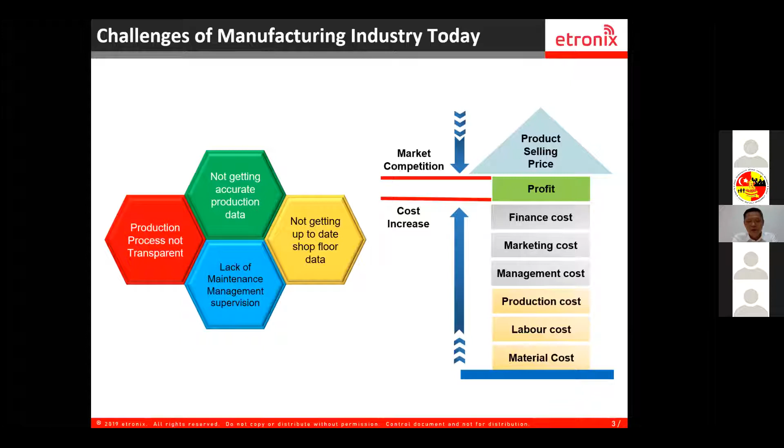Before I start introducing MES, I think it's very important to discuss the challenges of the manufacturing industry today. In today's market, whenever I meet my customers, I always give them a lot of respect, because for a factory, it's really not easy. Customer demand is getting higher and higher, and I'm sure if you're in manufacturing, your customers come back to you every year asking for cost reductions.

But their requirements keep getting higher. I have a customer who told me that last time, for every product they produced, they had to submit 3 measurements, requiring 3 people to produce the report every month. But now they have to submit 7 measurements. So customer requirements are getting higher and higher.

Cost is getting higher and higher. You have labor shortage issues. Minimum wages keep increasing, and you have to compete with so many other countries. Those are external forces, and here we haven't even included the challenge from COVID-19.

I think this is also something unprecedented in history. We had to experience 3 months where operations were interrupted. But those are the external forces.

Internally, as an SME, as a manufacturer, we have to ask ourselves: are we good enough? Do we have a very good system to manage our company, our factories? Often, when we go into a factory, we hear the problem that they are not getting accurate production data. They don't really know what's happening on the shop floor.

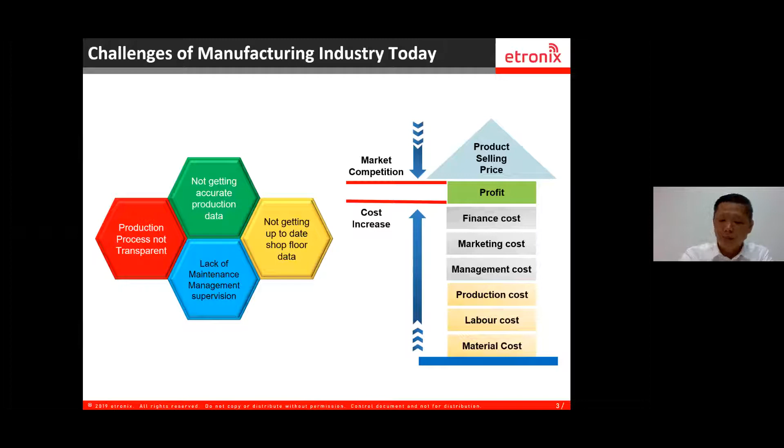This is a very conventional shop floor management issue. I've been to so many factories and studied their systems. Some of them have accounting systems, some have ERP systems to handle raw materials, customer orders, and planning. But a lot of the time when we talk about production and shop floor management, they depend a lot on paperwork.

They have manual production orders. They record production downtime manually into documents. Then the production output is recorded on a job traveler, written up manually. At the end of the day, they have a data entry clerk key all these things into Excel. By the time they compile the report, management only gets the data the next day or two days later.

Despite all the manual work they have to do, the decisions coming to the shop floor are always too late. For example, downtime happens today, but management only finds out the next day. So the decision is already too late.

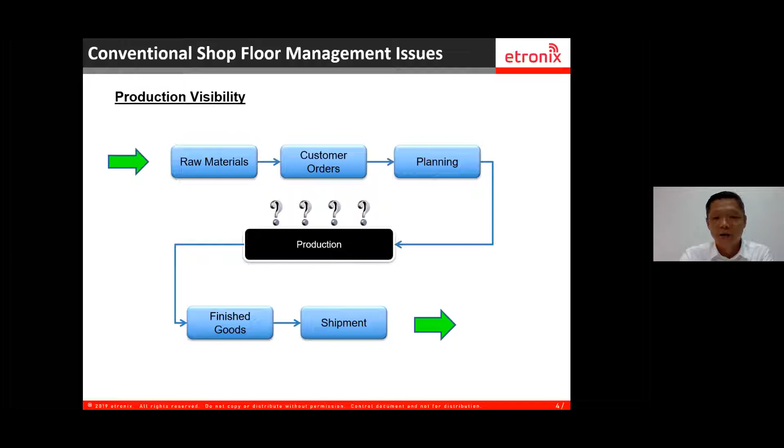Furthermore, all the data collected manually, written down by the operators or line leaders, has data integrity that is often questionable. This is from so many years of experience speaking to manufacturers in Malaysia, especially SMEs — really, on the shop floor, they don't have a proper system.

Okay, so what is the MES? MES is basically a shop floor system. It's a computerized system used in manufacturing to track and document the transformation of raw material to finished goods.

It gives management information, so you can actually know the current condition of your shop floor, and from the information that you collected, you know how you can optimize to improve your production output, and also control the multiple elements of the production process.

In short, in the manufacturing world, we talk about 4M: materials, manpower, machines, method. Method is basically the production process. Some companies say they implement 5Ms or 8Ms, but basically you can't run away from this 4M. What material you use to produce your products, who is the person doing the job, which machine you are using, and what production process it went through.

So this is the answer an MES system can provide to you.

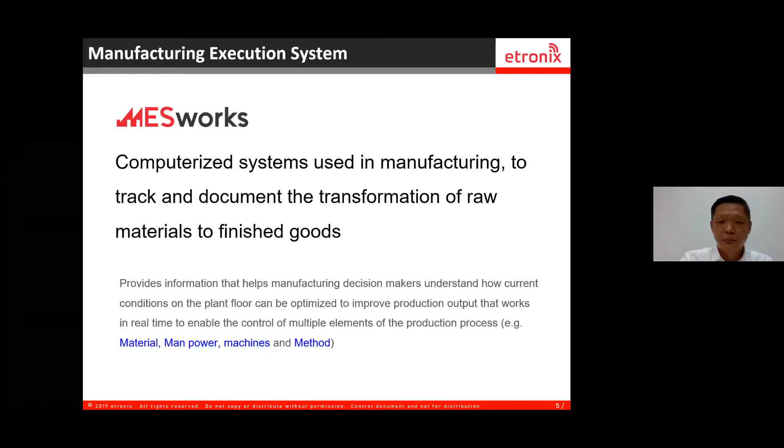In another definition by MESA, MES is also defined as a dynamic information system that drives effective execution of the manufacturing operations. So MES is purely designed for the shop floor. It covers every facet of your shop floor, and it also does the track and trace of the WIP, to give you the full product genealogy.

Product genealogy here means that when you have a finished good being produced, MES can tell you which lot of material you're using, which tool you're using, which operator is doing this job, what the quality data is, and which machine you use to do this. So basically it gives you a full product genealogy of the product that you produce.

And also it helps you to collect critical manufacturing information like the yield, your defects, your downtime, the cycle time. All this data is very, very useful nowadays, because I think manufacturing has changed a lot. The speed of model change, the product life cycle - last time we talked about 18 months.

Now, I don't think you have that kind of luxury. And a lot of data that customers want you to provide to them, including, when I produce this part, which machine you are using, which mold you are using, what the mold number is - all these things. So all this data you need to provide for the customer.

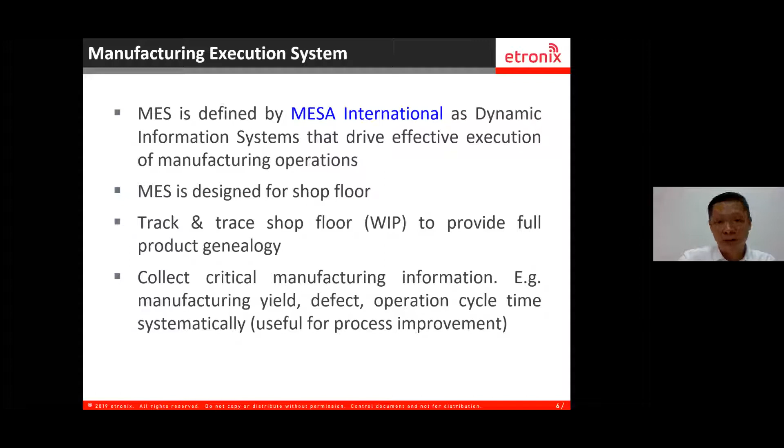I think this is a very important topology. I hope to share with everyone here a manufacturing topology. So there are actually 4 layers in today's manufacturing topology.

The first layer is machine control. This talks about the sensors that you have in the machines, or testers, measurement tools and equipment. Those are the tools that you actually use in your process of manufacturing your products.

So there is a gap between ERP and machine control, because a lot of the time ERP does not link to machines. So you need another layer of the system, which we call MES, to gel these two together. And then of course after ERP you have business intelligence for you to do a lot of reports, dashboards - all these business analytics tools.

So from machine level to MES, we talk about real-time manufacturing, meaning we talk about seconds, we talk about minutes - that information has to flow to MES. But if you talk about ERP, usually it's a delay management. Why do I say delay management?

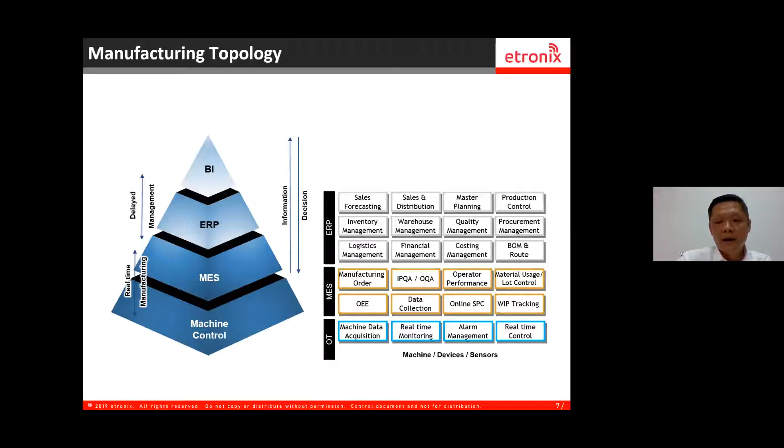MES also takes charge of material usage and lot control. For example, if you have process A, B, C, process A uses component A. After process A is completed, based on the BOM, I will deduct the usage, and then I will know what is the balance stock that I have on my shop floor.

And OEE, we talk about how we link to machines to give you the availability, the machine downtime, and also the reject information. I believe later on, Dr. Chua will cover more on this.

Data collection, I think this is important. A lot of the engineering data is being acquired from the machine, and the information stays at the machine. Usually you can view this data via the HMI of the machine, but how can we actually collect all this data to use it for analyzing performance, or even doing some predictive maintenance, for example, the temperatures.

You can actually have the profile, you can set the upper limit, the lower limits. Before this happens, like a reject, or even the machine going to break down, then it will give you the alerts.

Also SPC, and a lot of our customers do online SPC. Some customers previously would collect the data and key it into Excel to plot the chart. But if you have an MES system, you can do online SPC.

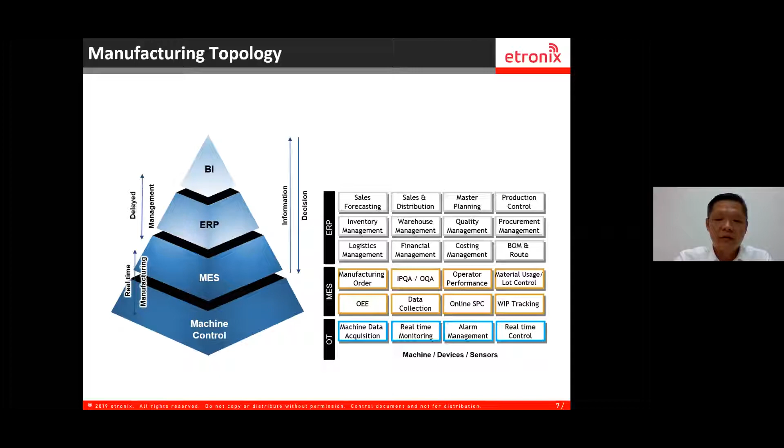After the goods are manufactured, all this data then falls back to the ERP for the integration.

I think the last level will be the BI. We talk about dashboard, cloud computing. You can do big data, and importantly, when we go to a factory to share with them the MES system, we ask the boss: hey, in today's business, can you use your mobile phone to check your current operation status?

For example, what is your plan versus your actual? Are you getting the real-time data? What is the machine that currently is breaking down? Can you acquire all this data via tablet or via your mobile phone? Or do you have to call your office to ask your production managers in order to get this information?

If this is the case, I believe it's time for you to look into an MES system, because in the ever-changing business now, you really need a system to give you real-time insight into your production situation. So I think this is the manufacturing topology.

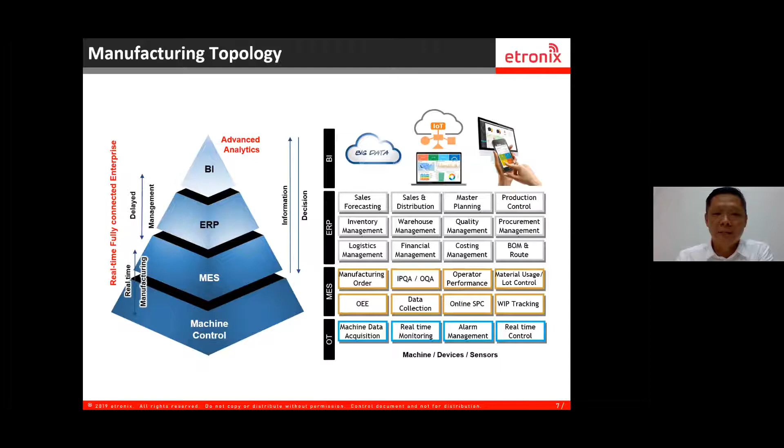Next, I would like to share another level. It's the same thing, but here I want to highlight the time frame.

So just now on the OT level, right? We talked about the time frame being very short - usually we talk about seconds, sub-seconds, minutes, or even hours. This data is being collected from the machine, collected from the sensors.

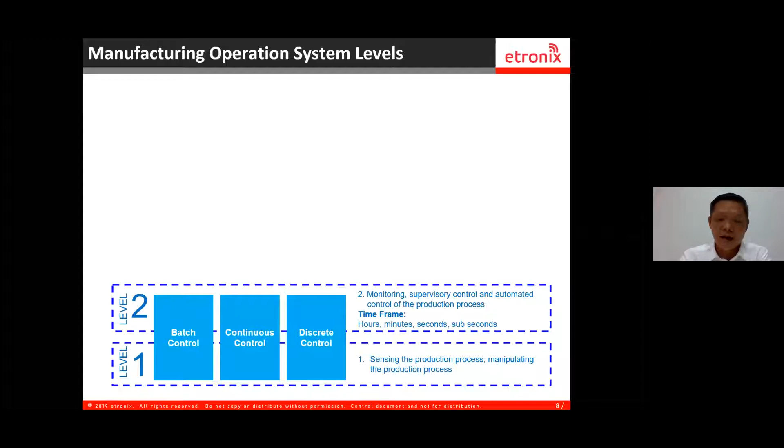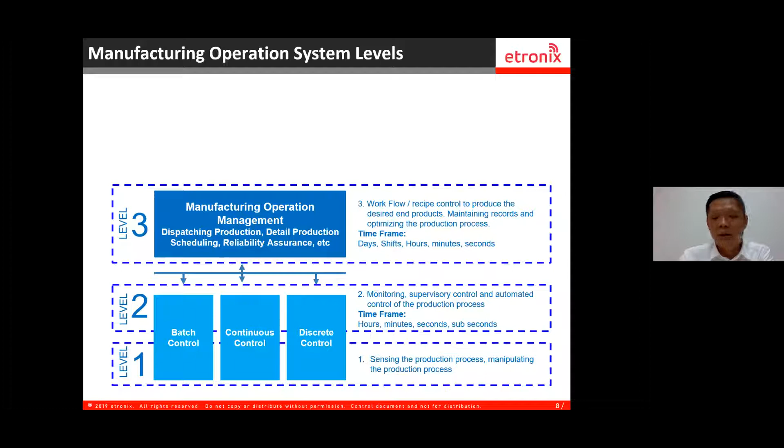So you need another level in MES, whereby we also collect the data from level 2. This information will also be used in the MES. So in MES, we talk about the time frame of seconds, minutes, hours, or by shift, or by day. In MES, we monitor the workflow, the recipe control, maintaining the record, and also optimizing the production process. Level 4 is ERP.

So in ERP, usually you don't go up to minutes. You don't really do back flushing every minute. You don't really do production output every minute, but usually you do it by day or by shift. Then some other reports - inventory report, financial report - you talk about weeks, you talk about months. You don't really monitor in that much detail.

For example, I issue 1,000 units to a production order. But I want to know at any one time what is my leftover unit on the shop floor. In ERP, you cannot know that. But if you have MES, it will, based on the quantity you have completed in real time, minus off the components you used based on the BOM. So at any time you know what is your real-time WIP on your shop floor.

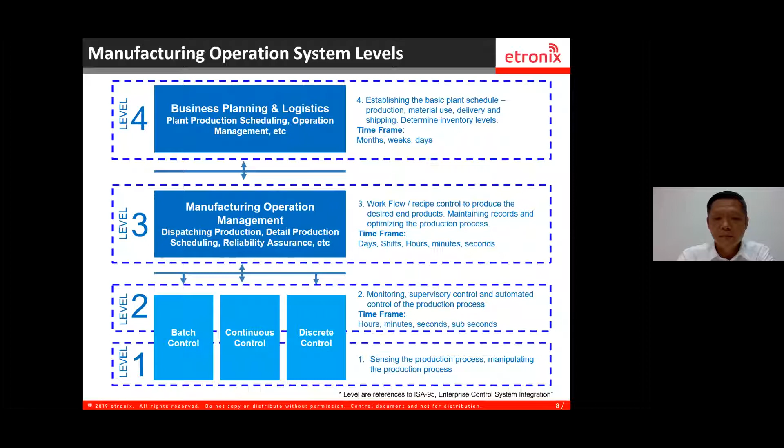So what other things does MES provide? A few things I want to cover in more general terms. First is the product definitions. Product definition basically is all the things involved in defining how to make a product. For example, you have certain production rules.

Production rules mean that if I'm using certain components with a short shelf life - for example, if you are doing electronics, you use solder paste. This solder paste, after you issue it to the shop floor, within 24 hours you have to finish it. If more than 24 hours, this thing cannot be used anymore. Those are the rules that you set in MES. So MES will keep track to make sure that if it's expired, your machine cannot run.

Bill of material is usually linked with the ERP. So ERP will define the bill of material, and then it will integrate to the MES. But bill of resources, especially the processes, MES usually keeps track of even more detailed processes. So in MES, we maintain what we call the routing, or even the recipe data.

Management of resources including your manpower - in MES we even maintain that for this process, only qualified operators can run it. If an operator tries to check in at this workstation and is not qualified to run this machine, the system prompts an error. So you also eliminate unqualified persons from doing a particular process.

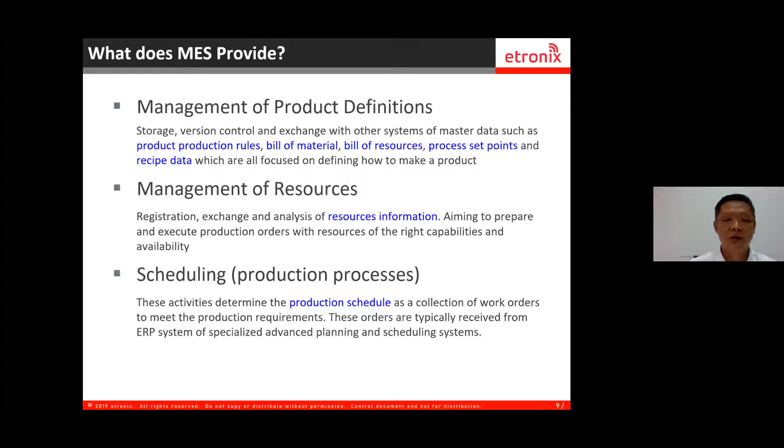Scheduling is also important because after the work order is released to the MES, you will need to schedule which production line will run that particular production order. Then there's dispatching of the production orders.

Here, for example, if you are doing metal precision work or plastics, your work order is a bulk, but actually when you release it, you go by batch. So every batch then goes through multiple processes. These are the detailed things that MES will do.

So usually, after the thing is dispatched, you will have a lot of small lots, and these lots will flow into the WIP. This is where MES will keep track of these lots - what process it went through, whether it's correct. The process should be process 1, 2, 3 - you cannot do process 1, 2, 4. You've got to follow the process set in the MES.

If you jump the queue, the system detects it, or if you're not following the operation design, the system will give you an error. In certain cases, we do machine interlocking - if you jump the process, we will stop the machine because you're not following the defined processes in the MES. Execution here is about controlling the progress and checking on the resources. So if you are not following the designed process, the system will prompt an error. This is very important, especially when dealing with medical devices, electronics, or automotive - anything that cares about human life.

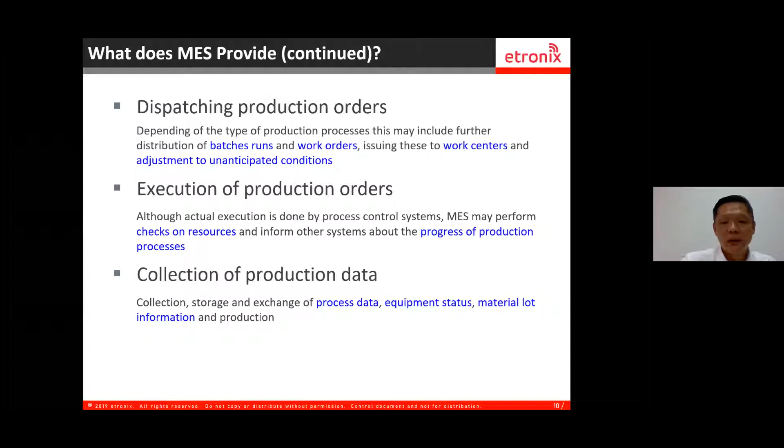Okay, so those are the things that are important, if let's say today you are dealing with some medical or automotive kind of industry customer. And collection of the production data, for example, the process data, what process it went through, the equipment status, material lot information.

And also MES gives you production performance analysis. Most important, like your plan versus your actual. You want to know from time to time. Any one time I want to know, I plan 1 hour, I've got to achieve 500, but in actual fact, what is my achievement?

Okay, so and also like OEE, you want to know how effective you operate the machine or equipment. So if let's say your OEE level is less than 80, well, then what is the main cause of this lower OEE percentage?

And also MES gives you production track and trace. So especially in Johor here, we have a big customer like Dyson. So Dyson, actually for whatever product they subcon to the main con, right, they want to have track and trace, or even I think nowadays for any electronic company.

So they really want to know what material that you use to produce the part. If let's say any reject or defects, right, they can very easily trace back to what other lot that is being affected. So this is very important for manufacturers today.

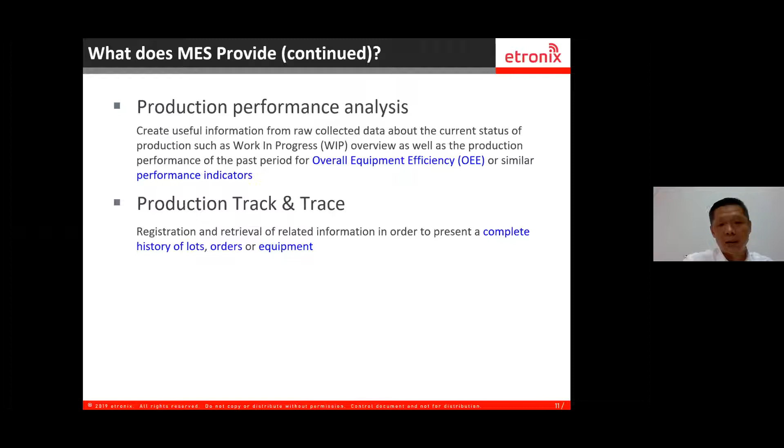If let's say you do some subcon for electronic devices, medicals, automotive, I think this has become one of the norms, the customer requirement to have the traceability.

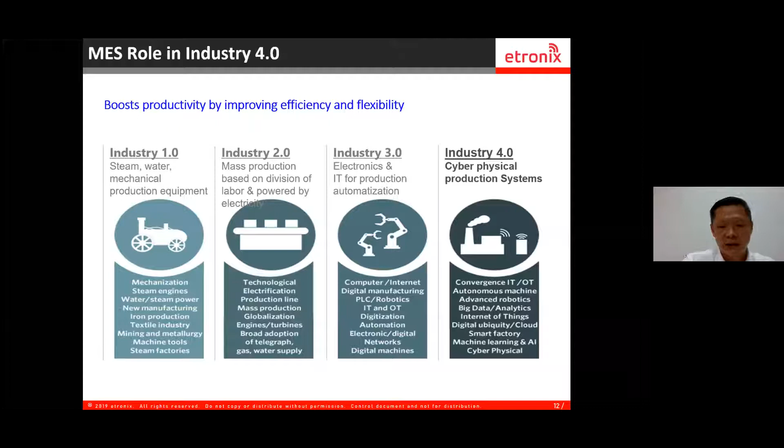Okay, so and also MES role in Industrial 4.0. I don't want to elaborate furthermore on Industrial 4.0, but Industrial 4.0 covers so many things, IT, OT, robots, big data, Internet of Things, smart factory, etc. So there are so many aspects today. If let's say you plan to move into Industrial 4.0, you talk about AI, data science, analytics, automated or advanced warehousing, machine learning, robotics.

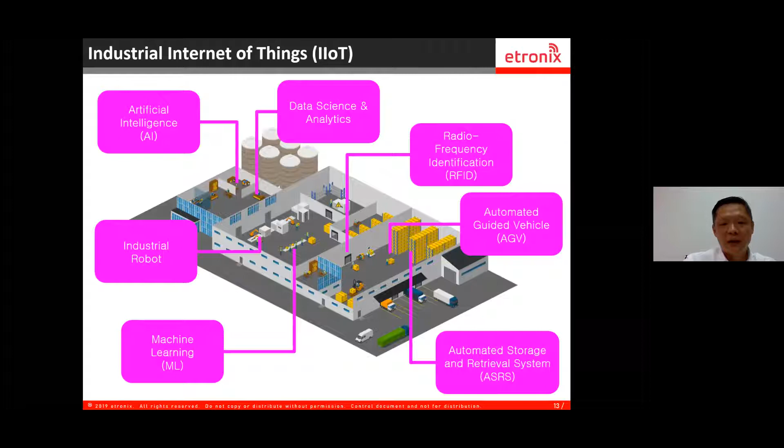So all these things, there are so many different aspects. But you cannot deny that, I mean, there are so many things, how do you want to gel them together? Really, you need to have a core system that can gel them together.

MES actually in Industrial 4.0 today plays the role of the backbone. It has to communicate from the ERP. ERP, after you pass the work orders, to MES. So MES has to cooperate with the robot. The robot will give you some of the operation data, or even engineering data. So after the good is completed, then you will send to the ASRS, send in the AGV to collect the finished good.

So in between, if let's say the goods actually have an RFID tag, then you have to link with the RFID reader to tag the things. Or even though you want to do OEE, then you need to have your IoT things to communicate with machines to take the data, or machine learning.

Okay, so actually all these things, if you don't have a central system to gel them all together, all of them is actually an island by itself. There isn't any communication to do communication with all the different aspects. So that's why MES role is getting more important now in the Industrial 4.0 era today.

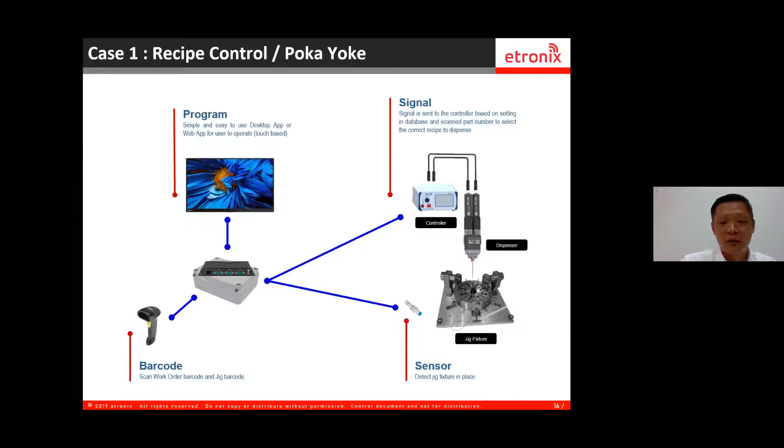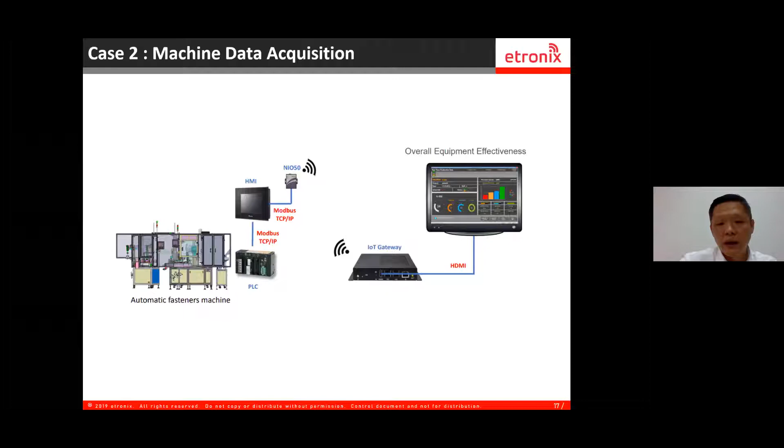This customer has a lot of machines on the shop floor, about 20 to 30 of them. All these machines link to the IoT gateway via the MES Wi-Fi network, and it takes this data and publishes it into Azure. From Azure, you can do Power BI for your dashboard. So you can see this is a live dashboard on the shop floor.

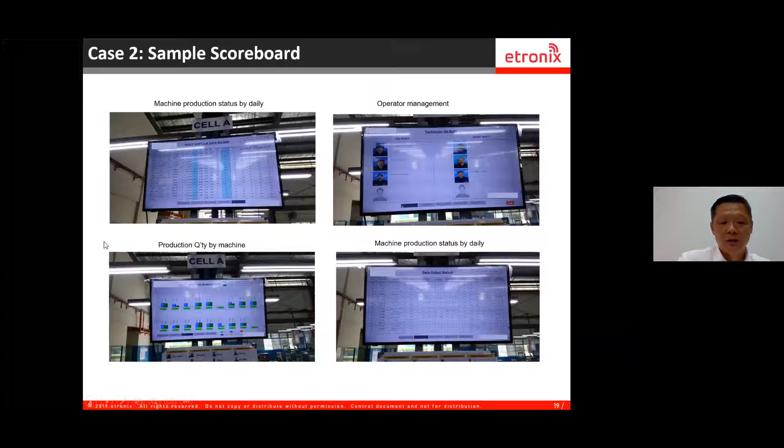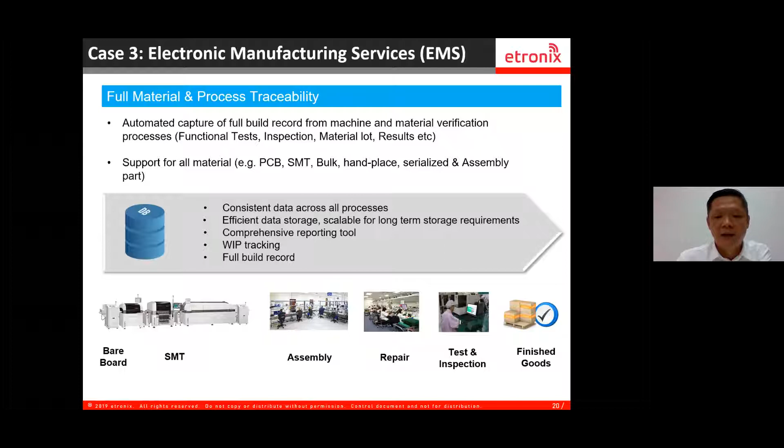Let me give you a brief example. At first, there's a laser mark, so the PCB board is marked with a QR code. We track every board because we want to know, when it goes to the stencil printing, what tool they're using. Even before you start, when you do the setup, you need to scan your stencil and scan the material that you use. The system will then check whether this material has been issued to the shop floor for more than 24 hours or not.

If yes, then you cannot start this machine. Also, after stencil printing, it will go to machine inspection, and the machine will check the thickness. If the thickness is too shallow, the machine will give a reject. If it's already rejected, when it goes to the next machine, that machine won't process it, because before the machine starts, it checks with the MES whether this board has passed or not. If it's an NG board, they won't process it.

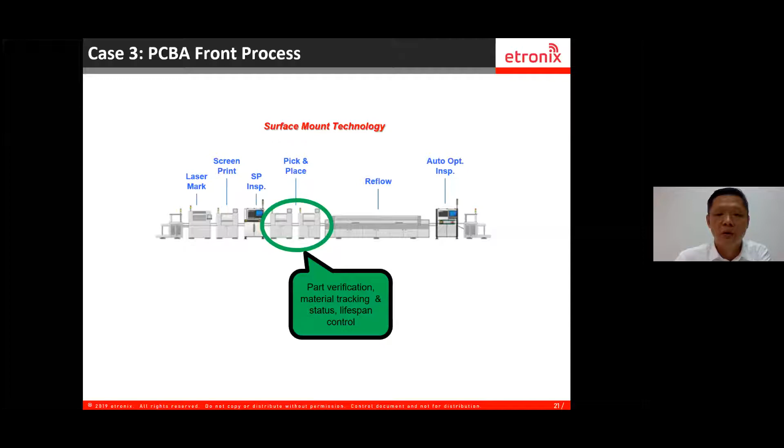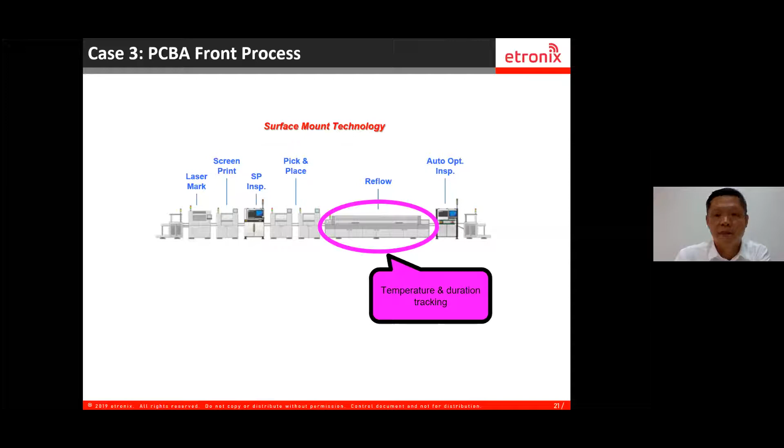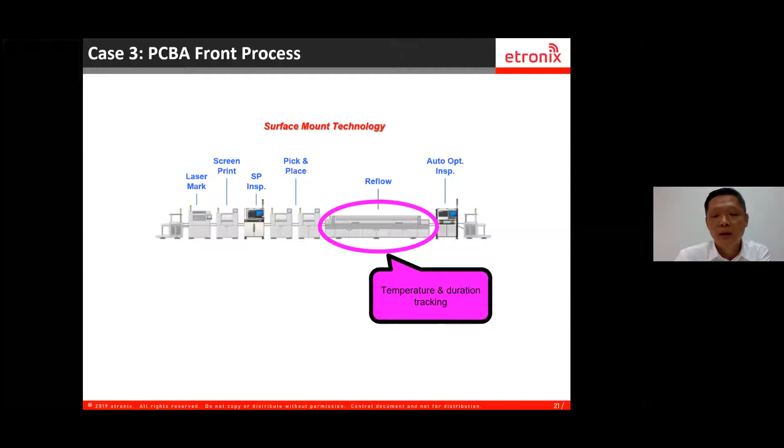Okay, so like SMT, we also link to the machine to tag what the part that you insert to this particular PCBA, because end of the day, every board, we want to know which lot of the material you use to produce the board. And also for the reflow, we check the temperatures, we check the duration, because the board, when it goes into this reflow oven, it cannot be more than a certain duration.

If let's say it's more than a certain duration before it goes to AOI, the system will also prompt AOI that this board, you have to stop, you cannot run. So all these things are integrated to the machine, and then all this data we will collect, the inspection result. So for AOI, we want to know if there's any defect and what caused the defect. And then if there's a defect, you will send it to the debug workstation.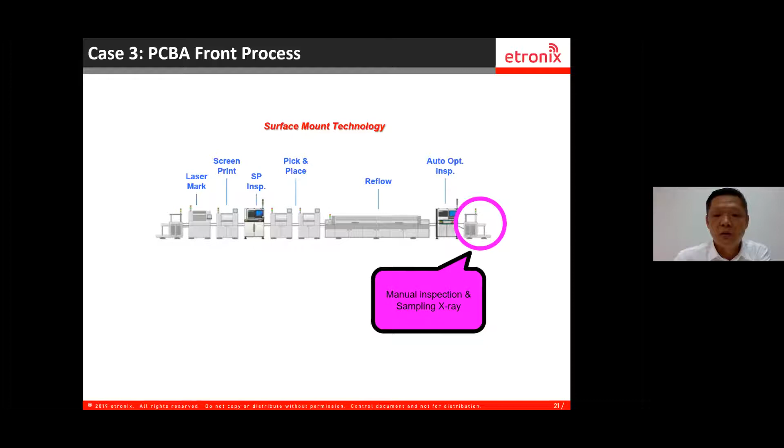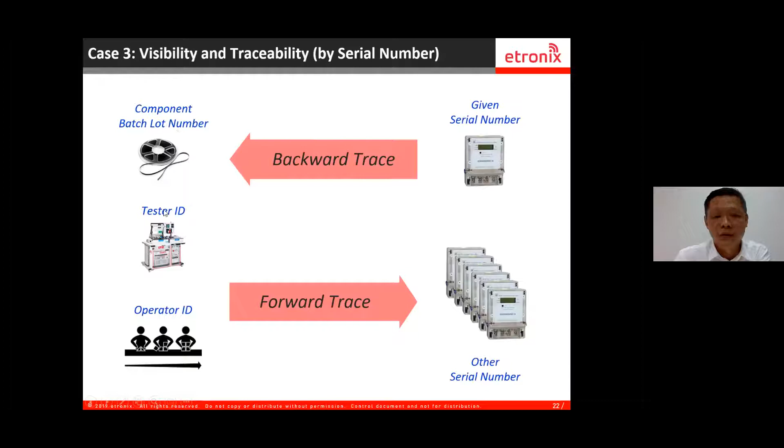So then all this data will be compiled in the MES. We do full product traceability. So for example, like you use your handphone - if this handphone got a problem, what the system can do is a backward trace. You scan the serial number of this particular product, then we track back what the components are, which tester performed the job, and what the test data was or which operator ID was doing that. So if we identify, oh, the problem is because of this lot from this supplier causing the problem, then from the system we can very easily do a forward trace to find what other serial numbers are using the same lot of the material. So this is traceability, both backwards and forward tracking.

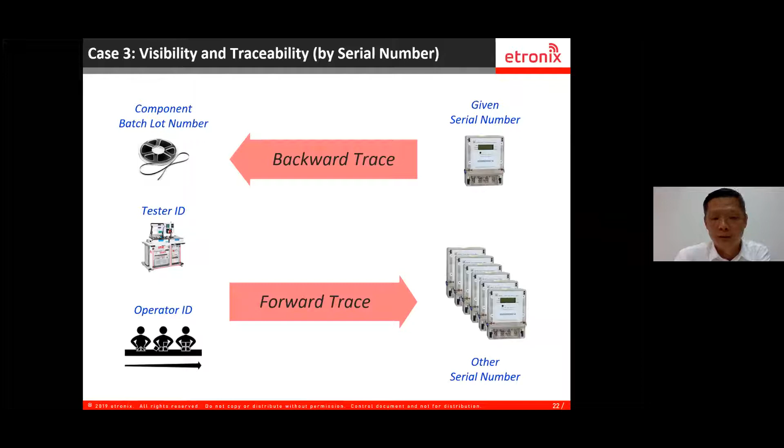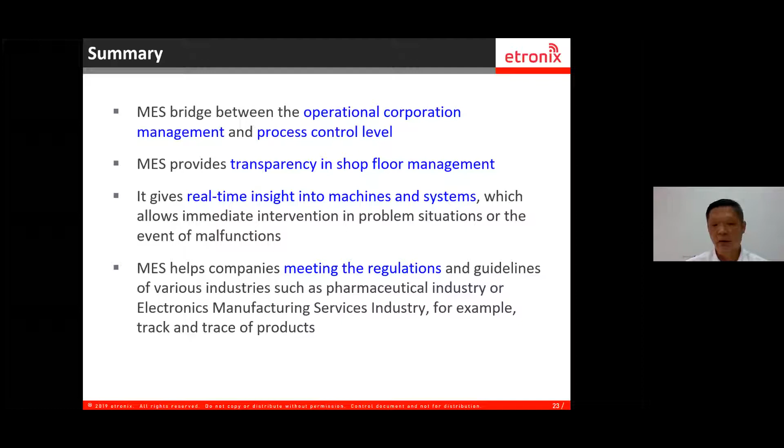So lastly, before I end the session, I will do a summary. MES actually bridges between operational corporation management and process control level, like what I showed in the topology. So it provides transparency in shop floor management, and also gives you real-time insight into the machine and the system. And MES also helps companies meet regulations, especially for pharmaceuticals and EMS, for the tracking of the products. Okay, that's all for my session.

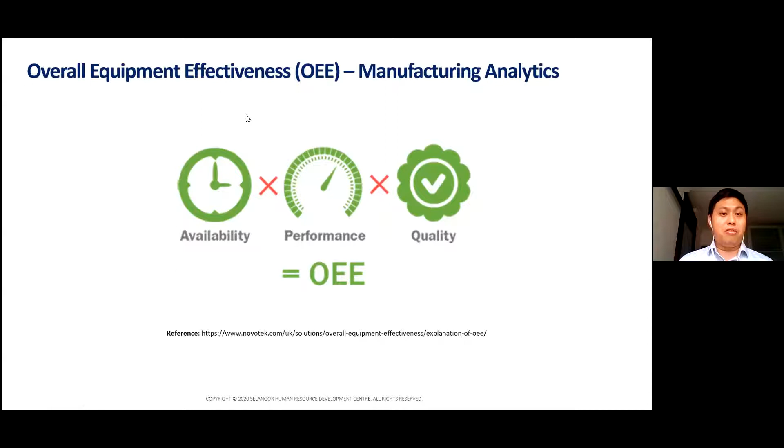So this slide shows you a very brief picture about OEE. Right now we always think that overall equipment effectiveness is a very complicated kind of analytics, but actually it's not. It's basically broken down into three major components, which are availability, performance, and quality. Now these three components will actually provide you a real example of what your overall equipment effectiveness is throughout your factory operations.

So let's look at the equation of effectiveness, the OEE. Now OEE is a journey which requires a clear, distinct understanding between effectiveness and efficiency. Effectiveness is basically the relation between what your theoretical or ideal production output is versus your actual production output. And efficiency is generally a relationship between the effectiveness of your machine running and the amount of effort that you require to achieve that level of effectiveness.

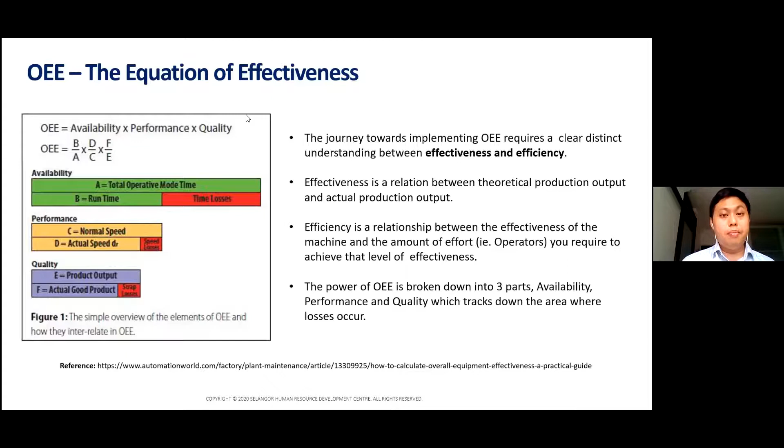So the power of OEE is basically broken down into three major components, which is your availability, performance and quality, which tracks down the area where your losses occur throughout your manufacturing process. So now what constitutes availability, performance, and quality?

If you look at this chart, availability is basically producing products as planned. You have 8 hours in a shift. How much within that 8 hours is your machine actually available and producing products? Basically reducing your downtime and minimizing your time losses. Some of the key parameters you will track are downtime tracking—that's very important in terms of your OEE. You need to know when your machine is actually idle, when it's actually down, and that is basically your overall availability.

Now talking about performance, it's about producing the right product at the right speed. If you buy a machine and it's supposed to produce 10,000 products in an hour, are you actually producing 10,000 products in an hour? That's basically your cycle time, your machine process time. So are you actually achieving that level of ideal production speed? That's the area you need to find out.

Some of the key parameters you will track are like product traceability—product in, product out, what's the time range, your machine time, your machine idle time, if your machine is reset. And of course your elemental cycle time study—that's very important to determine your actual production speed versus what is in your specification for this machine.

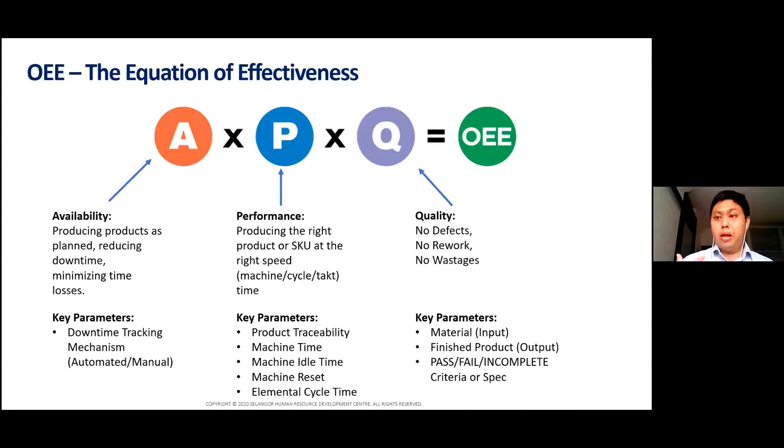Now when you talk about quality, overall what we want to achieve is no defect, no rework, and no wastages. Some of the key parameters you would track are material—raw material coming in versus your finished product. What are the criteria spec? Is it pass, fail, or incomplete? Sometimes when you look at the entire analytics of raw materials coming in and product coming out, you may or may not see a trend of production quality related to your raw materials coming in. So sometimes it's a material trend, or it could be a process trend. These are the things you can identify through implementing OEE in your manufacturing system.

So a simple illustration of OEE: you have a planned production time, for example you plan to produce 1,000 pieces in an hour, and your available time is 8 hours. So your ideal output for a day, if nothing happens, is 8,000 pieces. Now let's look at availability. Out of the 8 hours, you only get 6 productive hours after machine changeover, after your machine is down, your operators have to go on break. Sometimes you have minor stoppages because you need to change some processes in the machine, your startup time. So overall in a day, you only have 75% of your total available time.

Then talk about performance. Your machine is supposed to produce 1,000 pieces in an hour, but when you look at the average production in a day, you only get an average of 700 pieces an hour. So basically you're only performing at 70% of the capacity your machine is supposed to run.

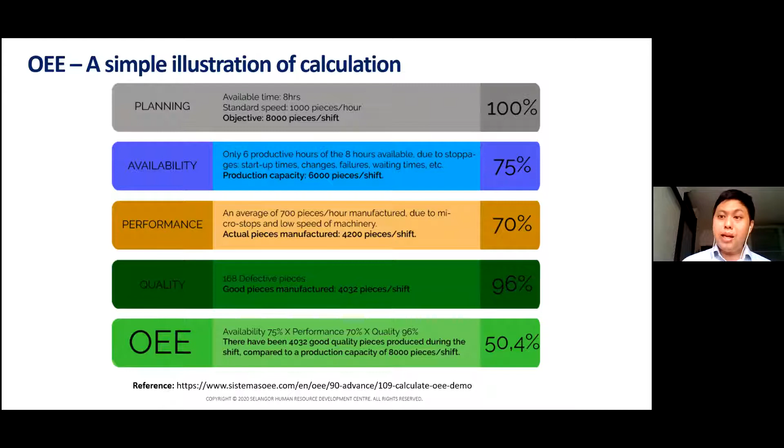Then you talk about quality. After producing all the parts in the 8-hour shift, you get 4,200 pieces produced, but 168 of them are actually defective. So if you look at availability, performance, and quality in terms of percentage, they are above 70%. But if you combine them together as a metric to calculate your OEE, which is a combination of A, P, and Q, you only get 50% overall equipment effectiveness.

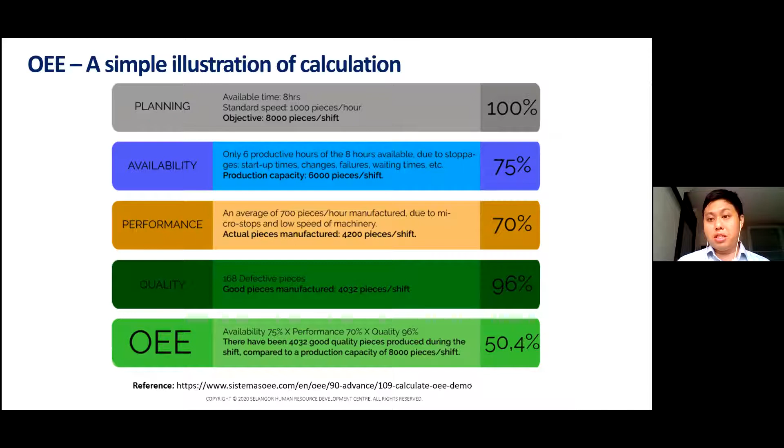That's actually your key highlight to understand where your production losses are in terms of A, P, and Q. So what are some of the losses that you will see? When you identify from APQ, what are the types of losses you will observe from that kind of data logging? You talk about breakdowns—machine breakdowns, setup adjustment time, which takes up your total available time. You have idling and minor stoppages, which will cause your cycle time to increase. And then you talk about the speed of your machine—sometimes it's not operating at the optimum speed. Sometimes your machine is supposed to operate at a very high speed, but if you operate at high speed, your production defects are very high.

So sometimes you need to consider that kind of scenario as well. Effective operating time—like you have defects in your process, defects in your rework, startup losses when you do changeover, when you want to do some test runs—those are losses that you need to account for. So what are these things called? These are called the six big losses in OEE manufacturing.

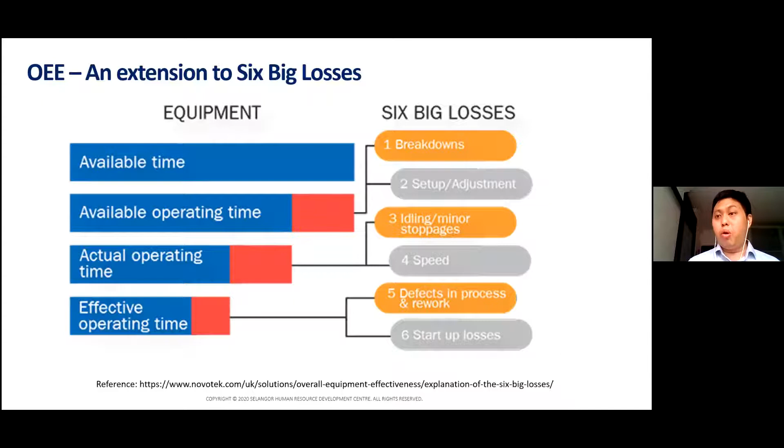So a very general outlook on this, like a summary. If you want to talk about availability loss, then you talk about unplanned stops, which is your equipment failure, downtime. Planned stops will be setup and adjustment. So sometimes during a changeover you need to have some setup time. That is your planned stops, right?

Performance loss—if your machine is having small stops, which is something that is not easy to see, especially when the conveyor starts moving. How do you know that at a certain interval it actually starts to jerk or stop? We will never know unless we track it, right? Slow cycles, reducing your speed—over time equipment gets wear and tear. That's something we need to track and identify. So those are items that you could track using your performance measure.

Then we talk about quality, right? Production rejects, process defects, startup rejects, which reduce your overall yield in a day. And overall you get your OEE, which gives you your full productive time and talks about the full effectiveness of your system.

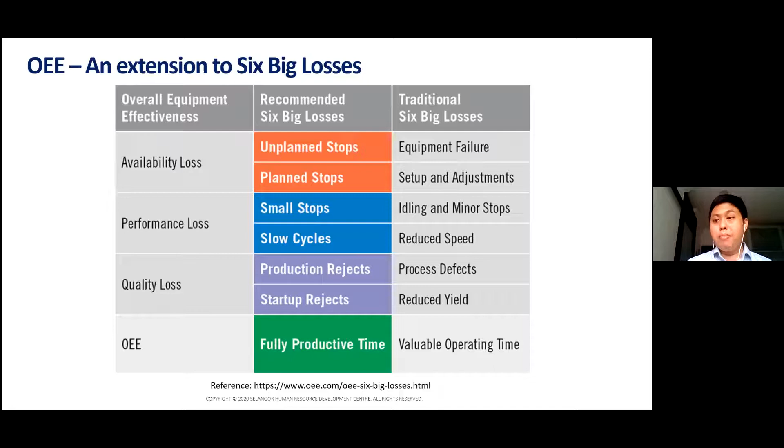So now, talking generally about OEE, how it actually works, and what APQ stands for—what are the strategies you need to implement toward achieving your OEE calculation? So we break down the components of data automation into 5 levels of maturity. OEE actually falls, in our perspective, at level 4, when you talk about data formulation.

Because when you talk about data automation, the first thing you need to do is collect data—that's level 1. Then you need to visualize your data, to know how your data trends are moving. Then you need to store your data, because when you want to calculate your availability, performance, and quality metrics, you need to store it, see a historical trend, then do your formulation, which is level 4. So that's basically how we measure the maturity levels for industries in terms of implementing OEE automatically in real time.

So let's give an example. This simple machine has 3 sensors—your input and output sensors, and an inductive sensor which tracks whether the part has metal or non-metal. That could be your quality metric or quality KPI. Then there's an emergency stop button and a start button—basically very common buttons in a system.

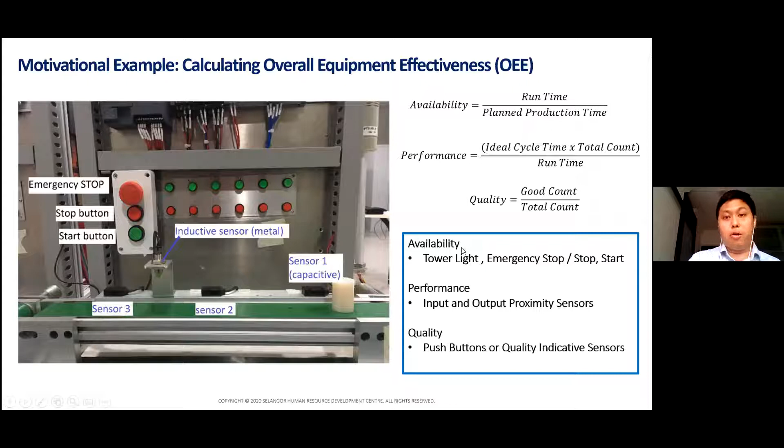And the last one is quality. What quality metrics are you using—is it visual inspection, push buttons, or quality sensors? Those available sensors will give you the exact metrics needed to calculate your OEE for your machine. So this is just a simple example of how we calculate OEE in terms of this dashboard.

So this dashboard is developed by our team. This is actually what we can teach you how to do. In this scenario, exactly what I showed you earlier, we calculate availability based on calculating downtime, planned or unplanned stops. If the machine is down, it will calculate its overall downtime. And then based on the overall downtime versus your actual production time, that is your availability.

Performance is calculating the time difference between two sensors, that is the simplest way of calculating your machine part in and part out. Based on the time, you know that to complete one process I take 4 seconds, to complete this process I take 10 seconds. So you already have that metrics, and you can calculate your overall performance in a day.

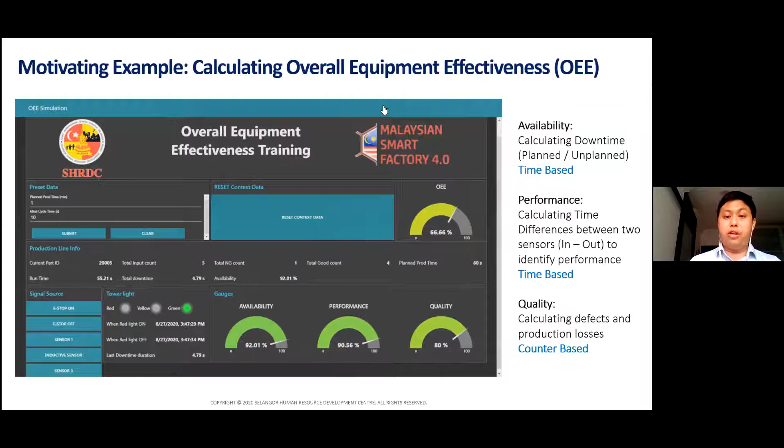Quality actually is based on just calculating defects, calculating losses. So if there's a reject count, press the button. If there's another reject based on quality, press another button. It's that straightforward. So all this information that you get, once you generate the data from level 1, you can straight away put it in a dashboard, formulate your OEE calculation, and basically develop a simple dashboard like this. It already can show you what is happening in your machine at a particular given point of time.

So what does real-time OEE do for you? It's all about minimizing time losses. You want to know when your machine has an issue. You want to know when the performance of your machine is dropping, when your OEE is actually dropping over time. So it's all about minimizing every single time delay to make the right decisions. Over time, machine wear and tear, you can visualize if your machine is down or running at the correct pace. Then you know that you can take the right interventions to ensure that you put in the right measures, the right actions, and make the right decisions at a given point of time.

So one example that I met with an industry where we support them in terms of building their own OEE system - what they shared with me is before they implemented OEE for their own system in terms of automating every data collection, that means there's a lot of transparency in data, a lot of integrity in the data collected. So what happens is that they found out that actually production is supposed to start at 8 o'clock, but operators only start producing parts at 8:15.

So you see 15 minutes is already gone doing nothing in an actual available time. So what does that constitute? That means that your availability, your total available production hours in a day, actually reduced by 15 minutes. So what if they take longer breaks? What if they go for longer toilet breaks, and all that? So all these need to be accounted, and you need to see that metrics running in a whole day in real time.

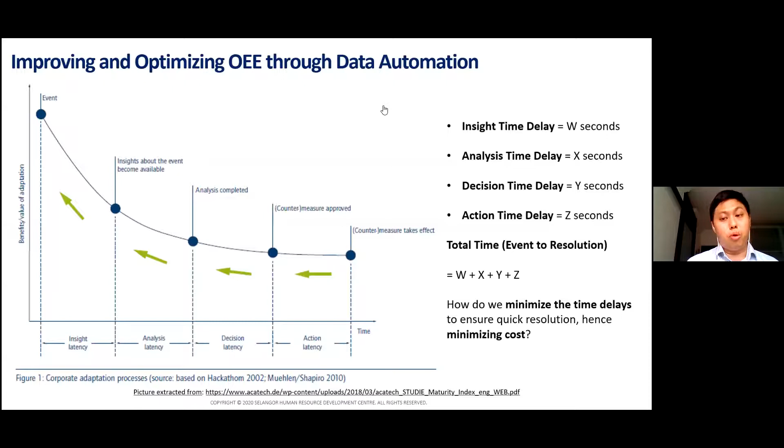Then you know what's actually happening, and you can take the right intervention strategies to help improve your OEE. So overall, what we're trying to discuss here in terms of OEE is time is money, and therefore it is also everyone's responsibility. So if you look at a typical OEE metrics, in terms of a global world-class standard, 85% of OEE is considered world-class. A typical OEE for a factory is 60%, but what you of course want to achieve is higher than typical.

You want to achieve world-class, and therefore automating your data collection is very important in terms of your OEE calculations. Definitely 40% and below is not encouraged, and therefore we would hope to support industries to achieve what we call world-class OEE, because by achieving world-class OEE, simple automation of data intervention strategies and all that will help you to reduce your cost of downtime, reduce your cost of performance losses, and therefore reduce your cost of quality issues. Therefore all your total losses and wastage will reduce, and you can definitely save a lot of costs from there.

So it is a role and responsibility of every personnel in the factory floor to really support the OEE initiative, or OEE projects that you want to do. So you need to provide clear definition of how data is collected, because you don't want data to be collected and then it becomes redundant - it doesn't give you any information. And you need to know what kind of key parameters you are tracking for each of your machines. Every machine may have different operations, every machine may have different cycle times, so that's something we need to identify.

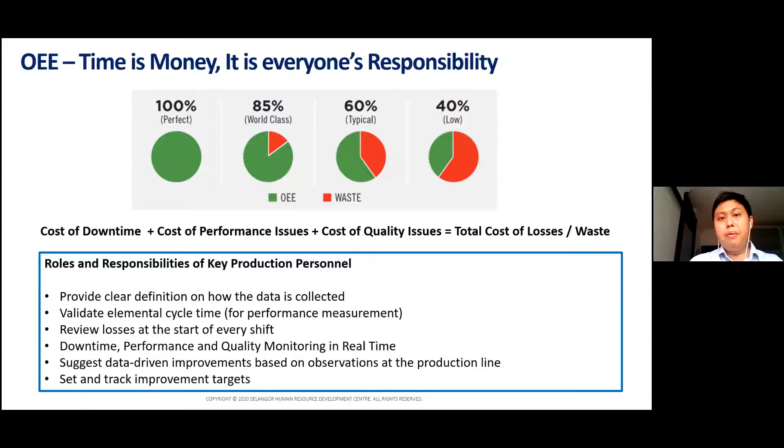Quality issue is due to raw materials coming in or operator dependent. So that's where you can suggest data-driven improvements based on observation at the production line to set and track your improvement targets. That really helps in terms of moving your OEE to world-class and of course to much better operations for your factory.

So the key advantages of implementing OEE in your production system, it really gives you greater production insights because it drives data-driven kind of strategies, increased competitiveness. Basically, if your entire floor has these metrics already calculated and reviewed in real time, it gives customer confidence that you are producing parts more efficiently, more effectively, and you are ensuring that you reduce your wastage and therefore your cost is actually kept low or more competitive.

Real-time productivity insight now gives you a real measure on what your machine is actually running, whether is it effective. Reduce machinery costs - once you know that your machine is having some issues due to performance, you can actually put in the right measures to do maintenance strategies to ensure your machine is kept operating at an optimal level. You improve your machine utilization - you can see which machine are idle, which machine are not well utilized. You improve your production output, you visualize your performance, you achieve more efficient operations, and optimize your workforce for improvement.

So if you automate your machines in your factory floor, I'm pretty sure you have at least 45 machines probably. If every machine is automated to calculate its own OEE, you don't need to do manual tracking. You don't need to deploy more staff to actually go and calculate your OEE at every hour, for example. The whole automation strategy does it for you. So you get to optimize your workforce for future improvement.

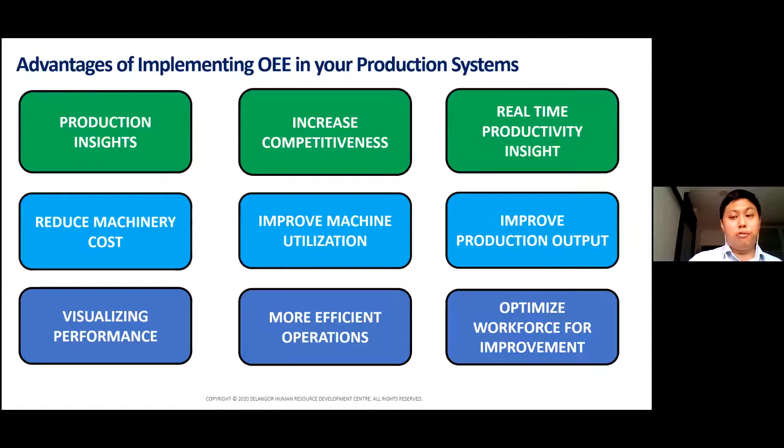So in general, what I've shared is all the strategies that you can do to implement your OEE, how beneficial is OEE for you. And of course, now the idea is how do you improve your OEE through talent development, which is essentially what we do at SHRDC.

So in terms of our Industry 4.0 programs, OEE is also one of our key components. It is part of one of our recipe programs, which is part of our Level 4. So once you're ready to start your journey in terms of your OEE, we would definitely recommend this program for you. For those companies who have not automated their data collection, we do have other programs as well for you, which is Level 1, data generation, which you can start that journey with us at any time.

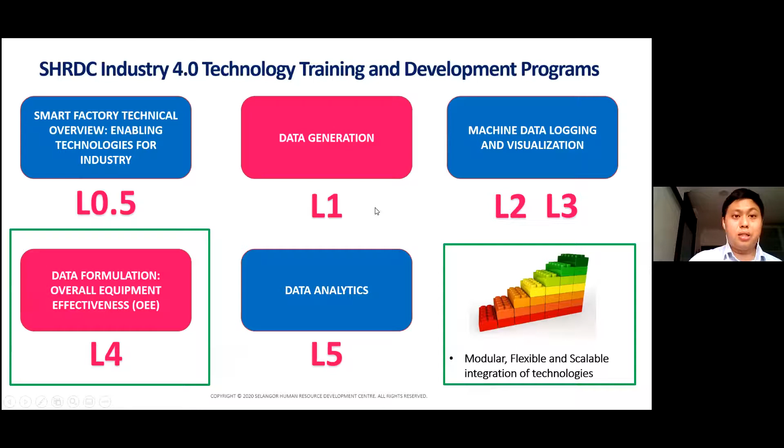So in data formulation, what we cover is we really help you to identify your key parameters required to monitor your OEE, to calculate them, describe the approaches to calculate your APQ. That's very important. Really help you to identify your six big losses - where your losses are. Construct a process flow to monitor APQ, which is basically helping you to develop your software for it, a simple software to calculate. Construct your process flow to formulate a calculation in real time. And of course, we also have hands-on session to integrate your software to the hardware that we have to verify the OEE system that you develop.

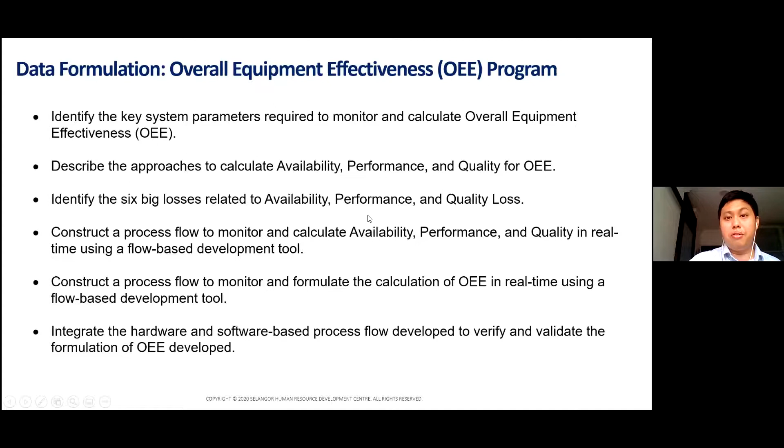So in general, our programs are following this kind of framework where you don't need to worry in terms of what machines you have and so on. Basically, the calculation of OEE is brand independent, and we can support you based on this framework, which we support most of our programs as well, which we go with multi-vendor, open communication, and help you to develop rapid prototyping.

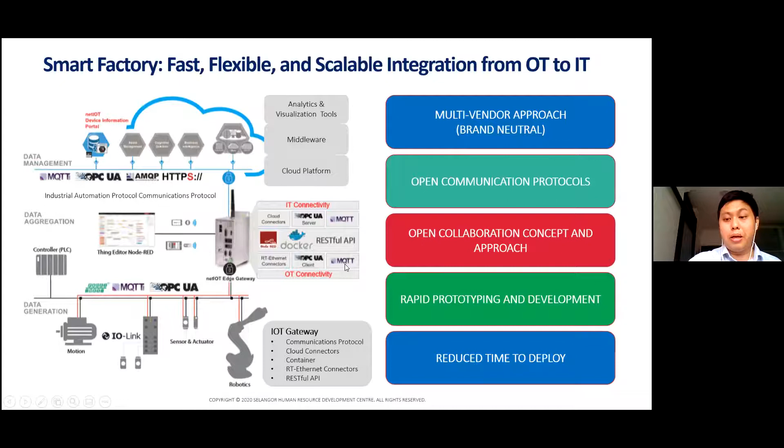This is some of the key areas that we support in terms of Malaysian Smart Factory. We do a lot of tech talent development - that's what we do as a core. After CMCO, we definitely welcome you to visit the Smart Factory. We have the space as a technology learning platform. Proof of concepts and lighthouse projects are what we do.

And of course, live demonstrations of technologies are also there together with our partners. And digital training platform is something that we are focusing on as we go along in this pandemic.

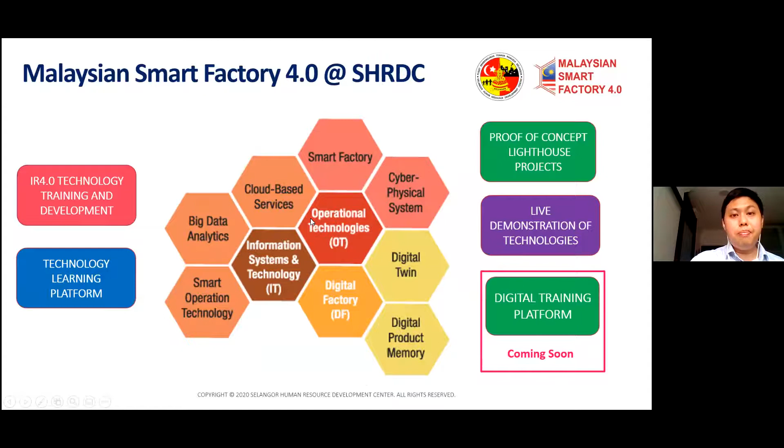So the journey of SHRDC, if you want to find out more about what we do, we have a lot of webinar communication series on our website, past, present, and future. So do check in with us. Our program details are also on the website. From time to time, we also will share some of the new initiatives that we have. So keep yourself updated in our database as we continue to inform you of more different initiatives that are there for Industry 4.0 and how we support the industries. So with that, that's all I have for everyone today.